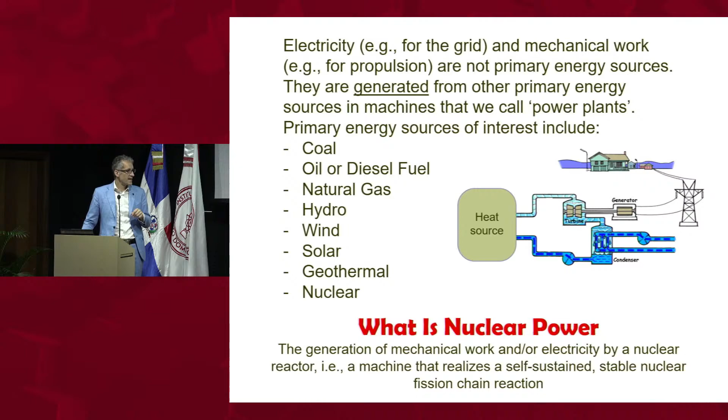Okay, so this goes back to basic physics. Again, very, very elementary. You guys are all scientists and engineers, so you know what the world is made of, atoms and nuclei. Within the atoms, you have a very massive but very small, high-density nucleus. Within the nucleus, you have protons and neutrons. And so the Z number, which is the atomic number, determines basically the element. So Z equal 1 is hydrogen. Z equal 92, for example, is uranium.

Two nuclei with the same Z, with the same number of protons, but a different number of neutrons are called isotopes, all right? And so for uranium, which is a material that we care a great deal about because it's the fuel that we use in nuclear reactors, there are two isotopes of interest, uranium-238 and uranium-235. So keep that in mind, please.

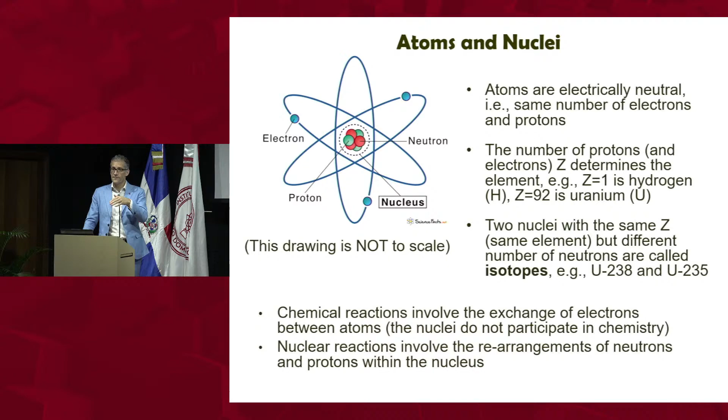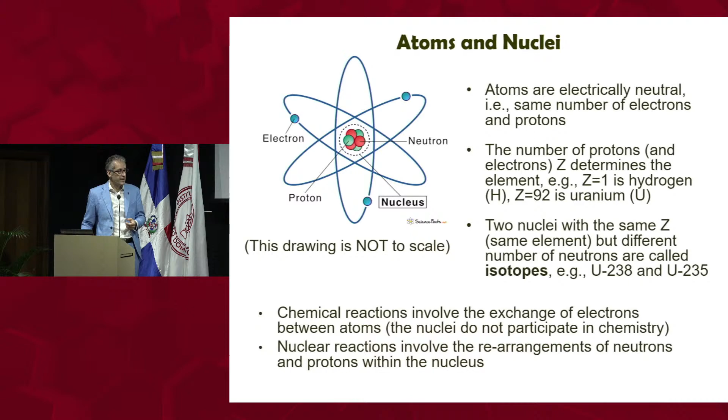Now, the first concept is chemical reactions. When you think about the combustion of something like natural gas or methane, it breaks bonds at the atomic scale. So it involves the exchange of electrons between different atoms. Those are chemical reactions. Nuclear reactions break bonds at the nuclear scale. So it involves the exchange or transformation of neutrons and protons within the atomic nucleus. Okay? And the energy scales for chemical reactions and nuclear reactions are vastly different, millions of times different. This is going to be important, as we'll see, in terms of what a nuclear reactor does and how it works.

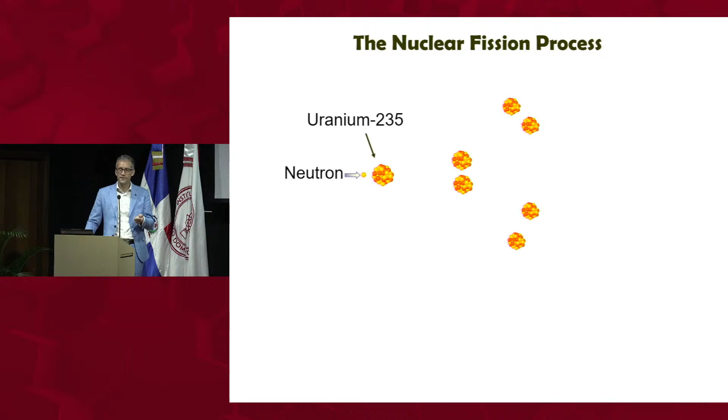Okay, so let's get to fission. So the starting point for the fission reaction is a nucleus of that uranium-235 isotope. If that nucleus absorbs a neutron coming from the outside, then more often than not, it splits into two halves. That's the process that we call fission. So it splits here into two fission fragments. Those are two lighter nuclei that come out of this reaction. Very importantly, this process liberates a lot of energy, which is going to be in the form of kinetic energy of these fission fragments.

And also very importantly, as you see here, this reaction liberates two or more additional neutrons. Why is that important? That's the interactive part, so someone can answer. Why is it important that this reaction also generates additional neutrons?

Because I can then create a chain reaction. If those neutrons find new nuclei of uranium-235, then I can have additional fission, you can see here, and then additional fission, and it goes on and on and on. Now, if I allow this reaction to take place very rapidly and divergingly, I do not have a nuclear reactor. I have an explosion. I have a nuclear weapon.

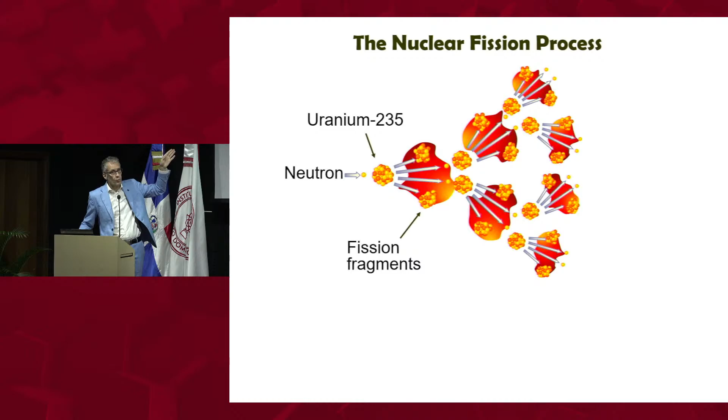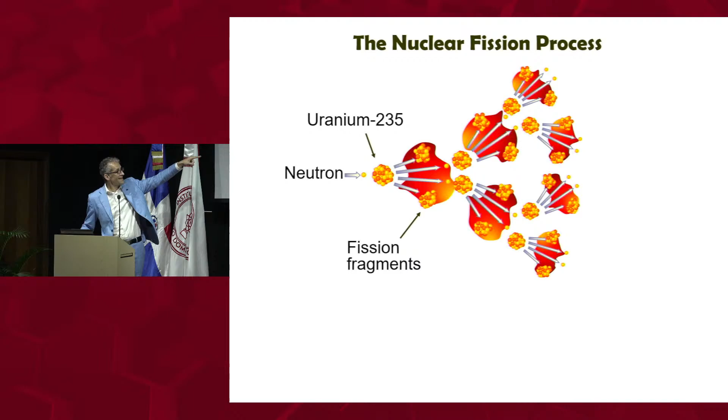But it turns out that it's actually very straightforward to control this reaction, to make it happen such that the rate at which fission takes place is constant. And so then it becomes nice and stable. So then what do I have? I have a constant source of heat, because the kinetic energy of those fission fragments is quickly converted to internal energy, or if you wish, thermal energy of the fuel itself. So fission essentially is a heat source, just like the combustion of coal or natural gas are heat sources. Okay?

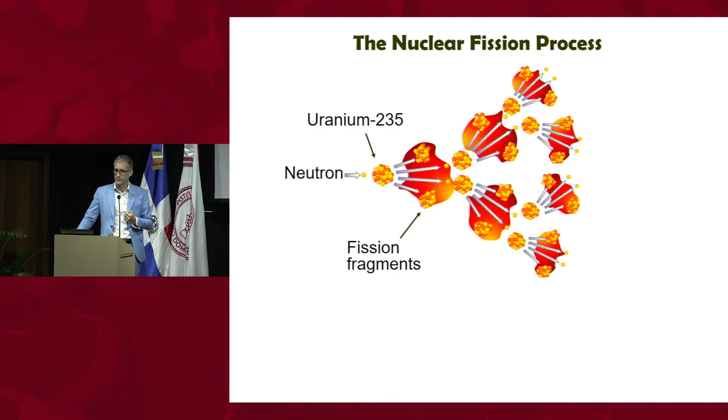Now, that fuel is uranium-235, that isotope. Is it rare? Is it common? Well, unfortunately, it's not very common. Only 0.7% of natural uranium, uranium is a material that we mine from mines, as I'll explain in a few minutes. Only less than 1%, 0.7% is uranium-235. That's the material that we care about. The rest is uranium-238, which is, to a first approximation, fairly useless. Okay, so again, keep that in mind.

I see people are nodding along, so you guys are following. I haven't put you to sleep yet.

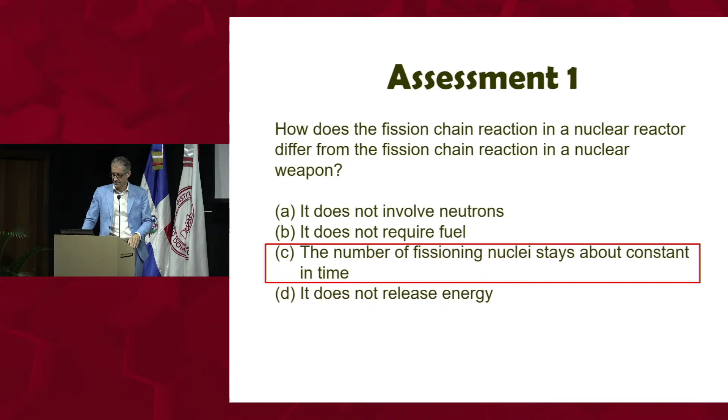Okay, that's great. Okay, so there is a great deal we can learn about nuclear reactors if we compare it to other energy sources. So here, I'm going to compare it to coal and natural gas. All right? So let's start with coal. We go back to basics, chemical reactions. You guys have seen this over and over again in your earlier classes. So when you talk about coal, you're really talking about the combustion of carbon. Coal is carbon. Right? So the reaction shown there is carbon plus oxygen. Where do I get the oxygen? From the air, right? From the air.

I get CO2. That's the unfortunate part. That's why people no longer like coal. We've been using it for 200 years. But now we no longer like it because it generates CO2, which is a greenhouse gas. That's the bad part. And then I get some amount of energy. It's of the order of some electron volts. For those of you who remember, again, these units, okay? That's a tiny amount of energy that comes out of a chemical reaction. Okay? How about natural gas?

What we call natural gas is, by and large, CH4, which is also called methane. CH4, okay? So what does that reaction look like? CH4 plus, again, some oxygen. I get, unfortunately, CO2, bad news. I get a little bit of water. That's no problem. Goes into the atmosphere. There is plenty of water in the atmosphere. And I get 2 units of energy. Okay? So natural gas on a per reaction basis actually gives you a little bit more energy than coal. That's all good. Now let's look at nuclear.

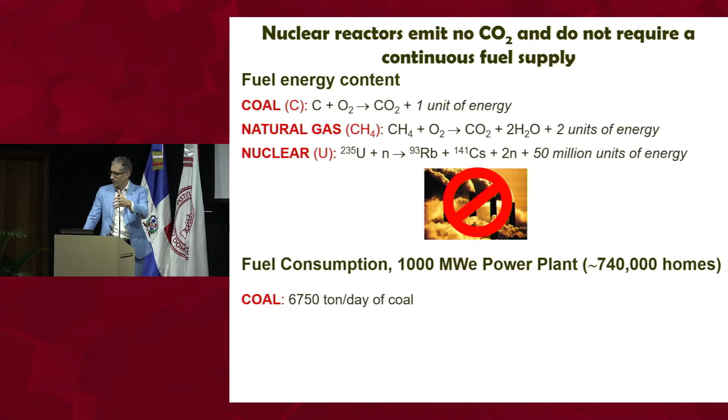Now, you guys have a big coal power plant here, maybe multiples, right? Catalina Point, right? Punta Catalina, or others. What does a coal plant look like? Well, yeah, it's kind of dirty, yes. But there is one feature that everybody notices about a coal plant. Isn't there a mountain of coal sitting outside? There is literally a mountain of coal sitting outside. And then there is usually a railroad. Why is there a railroad? Well, because you got to feed this beast 7,000 tons of coal per day, which means you got trains coming in on a daily basis, bringing coal all the time. No coal, no power. Right?

How about natural gas? Well, it's a gas, so you don't bring it by train. You have a pipeline. This plant would require 64 cubic meters of gas per second. That's, again, an exceptionally large amount of gas. And as soon as that supply of gas is interrupted, you don't get any power. Okay? So the nature of fossil plants is that unless you continuously fuel them, they don't work.

How about nuclear? Well, because the energy content of uranium is so high, that power plant would require 3 kilograms of uranium-235 per day. 3 kilograms, not 7,000 tons, not millions of cubic meters per day, but 3 kilograms. That 3 kilograms is something that I can hold in my hand, okay? So that's how much energy you have in there. The implication is that nuclear reactors don't have to be refueled all the time.

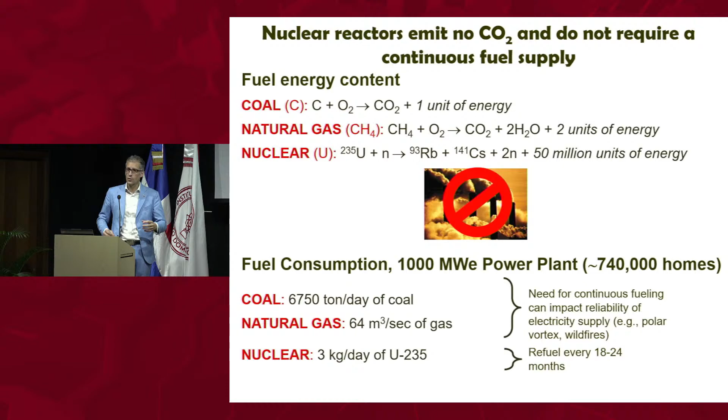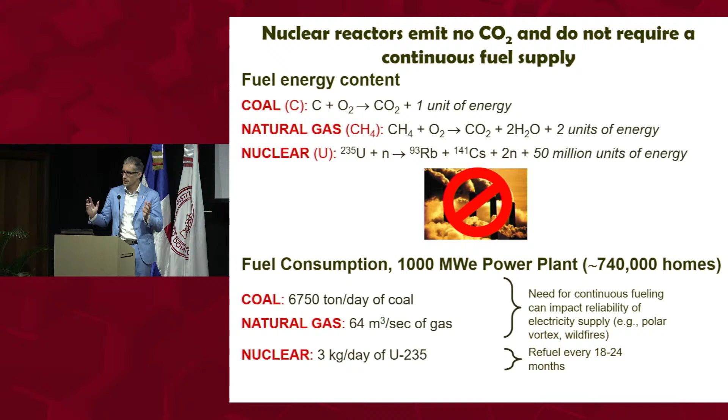Now, the latest design of a nuclear powered submarine in the United States is called the Virginia class. It's an attack submarine. And it's never refueled. In other words, they put the fresh fuel, the uranium, into the core, into the reactor at the beginning. And for 25, 30 years, for the lifetime of the boat, there is no need to refuel that sucker. It's amazing. And that's because the energy content of uranium is so high that you can keep going for ages without having to refuel. Okay, so big difference there between fossil and nuclear.

All right, so where do we get this magical material? It's all about uranium. Uranium is the fuel, okay? So I'm going to talk a little bit about the uranium fuel cycle. Where do we get it? How do we process it? In what form does it go in the reactor, etc.

All right, first thing is, like every other energy source that uses a fuel, you should ask yourself, how much fuel is out there? Right? You might have heard that, for example, in the past, people were concerned about, we're going to run out of oil. We're not going to run out of oil, by the way. There is so much oil out there, it's crazy. Same thing for natural gas. But the question is, are we going to run out of uranium?

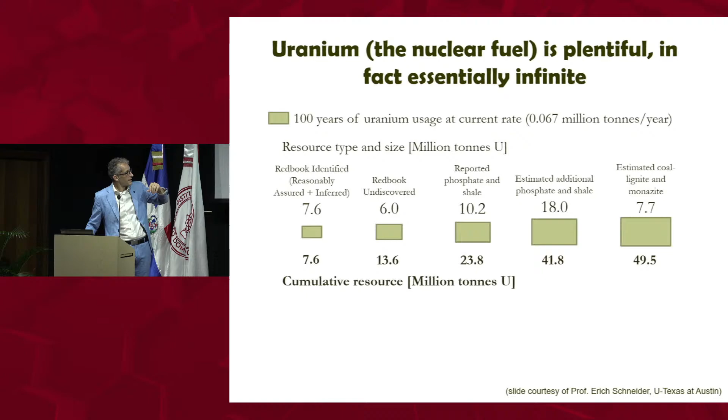So that would be 23.8 versus 7.6. That's about 3 times as much. So that's 300 years. And then if you go to additional estimate, maybe doubles. And then additional estimate, it goes up by another factor of whatever it is, 49.5 divided by 8. So based on these estimates for either what we know is cheap uranium as well as tailings from other minerals that contain uranium, you could probably go on for maybe 600, 700 years, okay? You say, well, is that enough? Okay, I think it's enough.

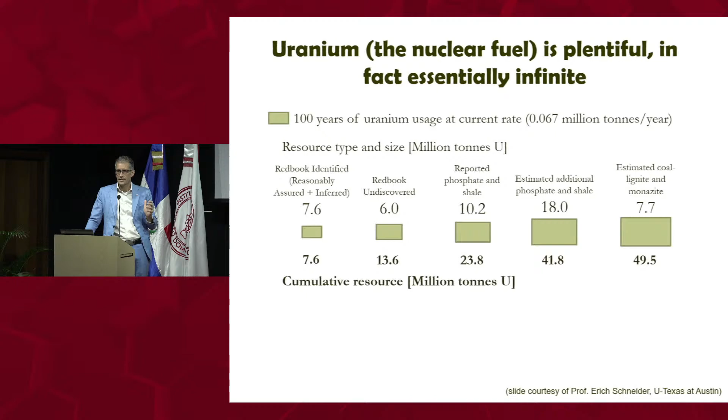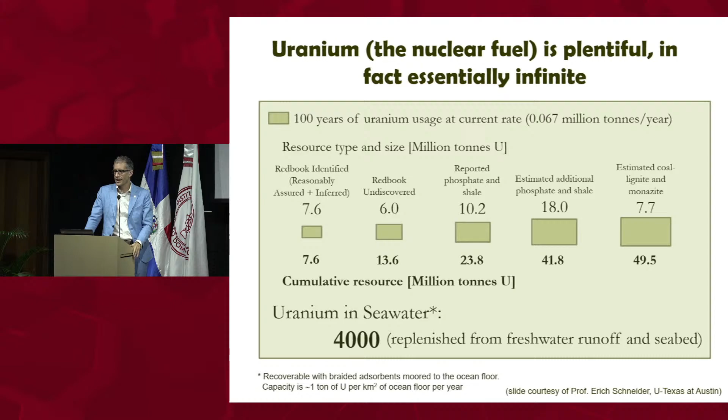But the truth is that there is uranium in seawater, naturally. There is parts per billion of uranium in seawater. Well, there is a lot of seawater, okay? So if you look at the number there, then it becomes practically infinite. So if we're able to extract uranium from seawater, which is actually relatively straightforward, then you're looking at uranium reserves or resources that are out in the tens of thousands of years. So we're not going to run out of uranium. That's good news.

Now remember what I said at the beginning. What we use as fuel is the isotope 235 of uranium. That's less than 1%, okay? So the fuel, to be useful in a reactor, has to be enriched. Enriched means that you have to increase the concentration of uranium-235 from 0.7%, which is natural uranium, up to, say, 5%. Okay, so you have these different categories of enriched uranium. Natural uranium 0.7, then you have low enriched uranium between 3 and 5%. That's what we use in current reactors, so you have to juice it up a little bit.

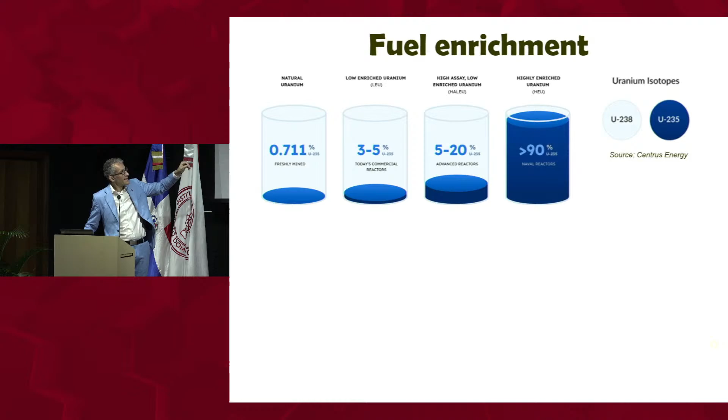There are some advanced reactors which use 5 to 20%, and then if you go all the way up above 90%, that's what the Navy uses. And by the way, that also becomes weapons-grade material. So when you go above 90%, in principle, you could use that also for nuclear weapons. All right? So there are all sorts of, as you can imagine, restrictions on how much you can enrich uranium, because then it becomes more military-based material. But in the commercial world, we stay within 20%, which is considered proliferation resistant.

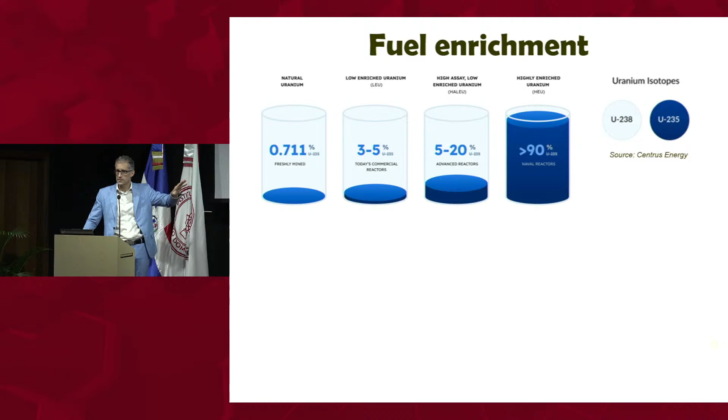Okay. Now, how do you enrich it? This is sort of an interesting process. How do I take uranium, which is natural at only 0.7% U-235, how do I juice it up to say 3 or 5%? Can I do it chemically?

Not really, because uranium is uranium. So whether it's uranium-235 or uranium-238, from a chemical point of view, it's uranium. You can't distinguish between the two isotopes from a chemical point of view. So I gotta do it with physical methods. And the best method that we have now is centrifuges, okay?

So first, you turn uranium, which is naturally a heavy metal, and so it's solid, you have to turn it into a gas. So you see it says there UF6, that's uranium hexafluoride. UF6 is gaseous. Okay, that's a good starting point. And then you inject that gas inside a centrifuge, which is spinning at very, very high speed.

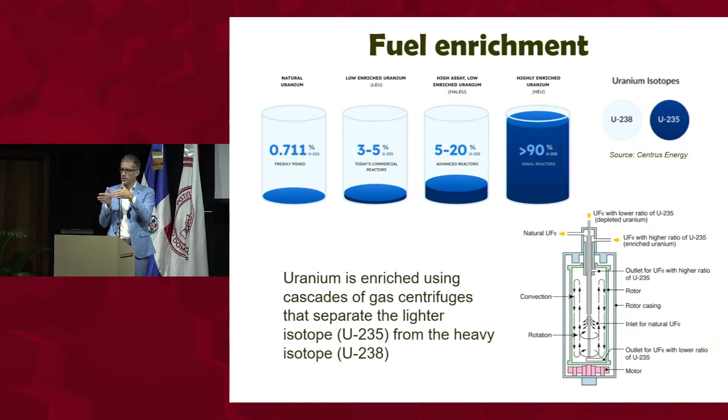Now, why does that separate uranium-235 from uranium-238? Because the mass is different, right? The two isotopes are chemically the same, but their mass is slightly different. So when you're spinning that gas, uranium-238 tends to naturally accumulate on the outside, and uranium-235 tends to stay closer to the center of the centrifuge. Okay? So then you scoop it out, and that's how you get a little bit more enriched uranium in the middle and a little less enriched uranium on the outside.

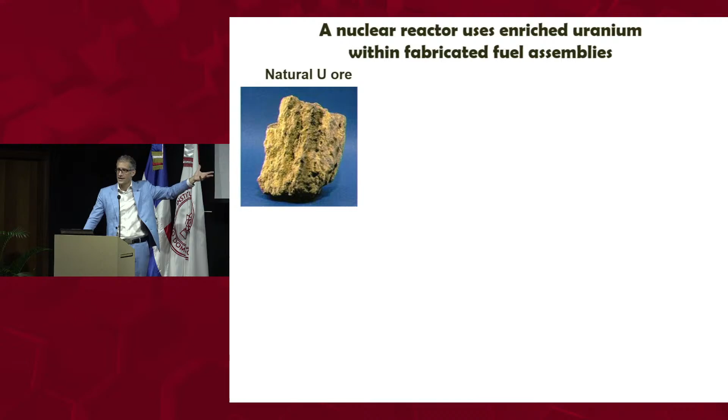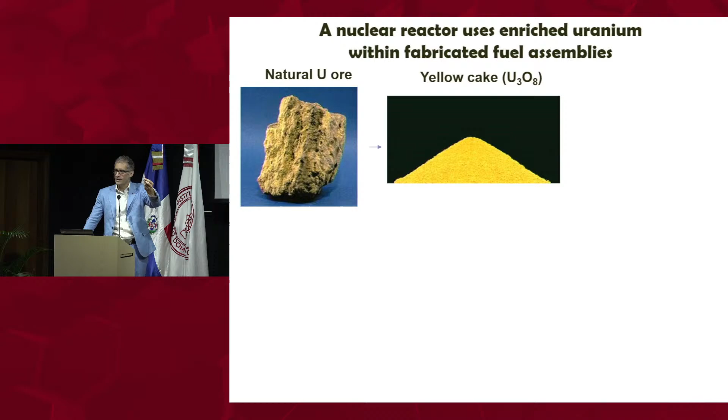Okay, so what does this cycle of uranium look like? This is a mineral that has some natural uranium ore in it. It is traded commercially as what we call yellow cake. This is sort of a funny name for this particular chemical, U3O8. It looks like yellow powdery flour, so it's called yellow cake. All right? Then it's enriched. It's turned to UF6, and it's enriched to whatever level is needed.

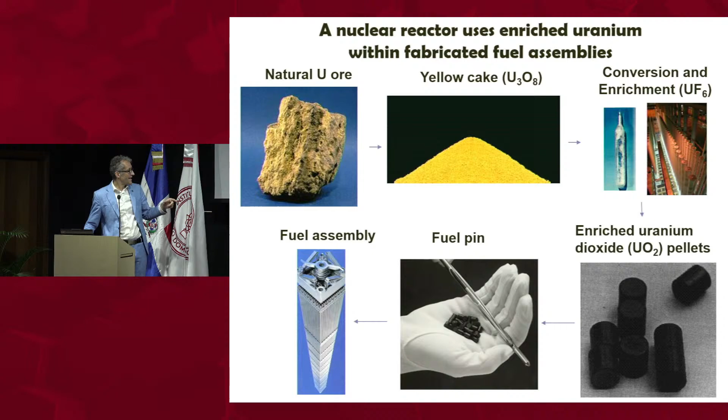It's actually used in the nuclear reactor as uranium dioxide, UO2, little pellets that look black like that. It is slid into these tubes made of a metal called zirconium. This is a fuel pin or fuel rod. So this is the basic element of the reactor. And if you put together many such rods, you get a fuel assembly. This object here is maybe 20 centimeters by 20 centimeters and 4 meters tall. And then it is these fuel assemblies that go in the reactor itself.

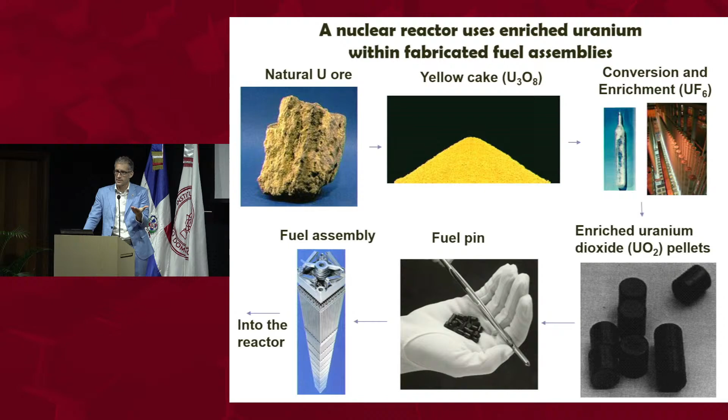Okay, and I'll show you what the reactor core, what the reactor itself looks like in a minute. But this is the fuel assembly or fuel element that goes in. Inside each of those little tubes, you have those pellets of uranium dioxide. That's where the fission reaction takes place. Okay, that's where the magic takes place, so to speak.

Okay, so let's talk about the reactor. What are the basic elements of a nuclear reactor? What do you need? Well, you need the fuel. You need the uranium. No uranium, no party, so to speak. You need a coolant. That's a fluid that picks up all that energy. If you just let that energy linger within the fuel and it keeps accumulating, what's going to happen? It overheats and melts. Okay, you don't want that.

So you need to pick up that energy from the fuel rods and take it elsewhere to do something useful with it. That process is done by a fluid, typically water in our reactors, that basically flows along those fuel rods and picks up the heat, if you will, and takes it elsewhere, okay? So that's coolant. Then we need a so-called moderator.

Moderator is a fancy word for a material that slows down the neutrons. So the neutrons that are born out of fission have a high energy, about 2 mega electron volts. That's high, it means they go around fast. It turns out that the probability for a neutron to cause fission, which is what we want to sustain this chain reaction, is higher if you slow them down. If you reduce their energy from 2 MeV down to a fraction of an electron volt, tiny, tiny. So we need a material that by collision with the neutrons slows them down.

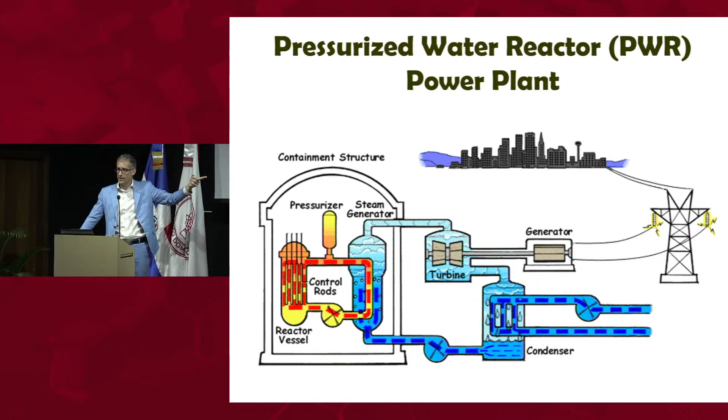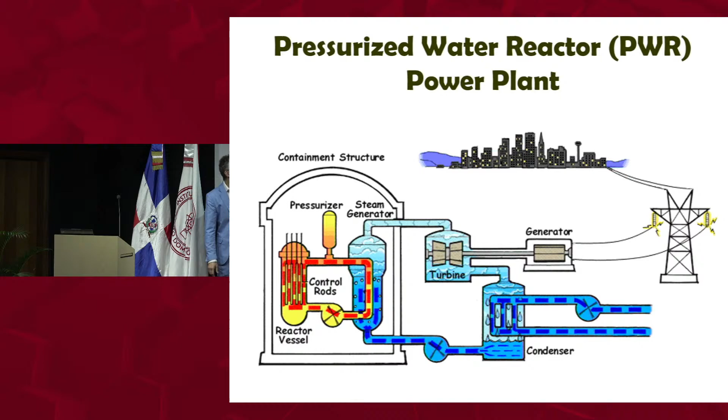So you see the energy goes from here to this blue fluid, which is water at lower pressure. That fluid boils. Now I have steam. With that steam, I drive a turbine, which drives an electrical generator, which gives you the electricity that goes to the grid. And then, as I mentioned at the beginning, I need to condense the steam that comes out here and pump it back to the steam generator. How do I condense steam? I need to cool it.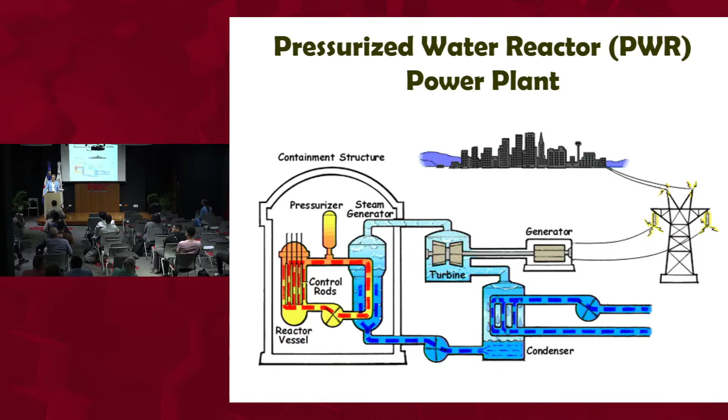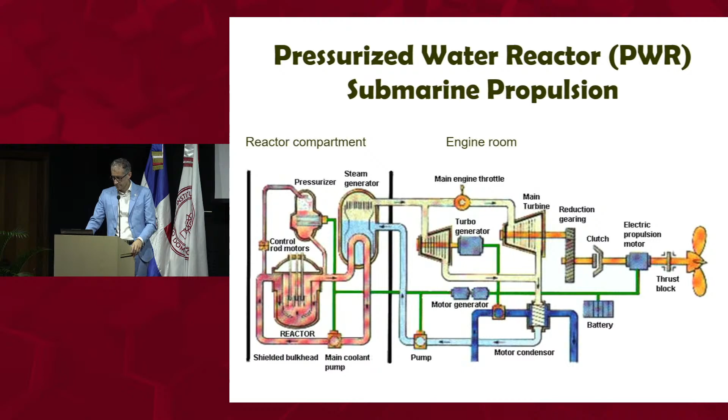What do I use to cool steam? Again, I use water. Water coming in from here, going out there. What water is that? Where is that water coming from? A river, the ocean, a lake. Okay, so that's why these power plants are usually located close to the sea or close to a river, close to a lake, because you basically need to bring in that cooling water to condense the steam. Okay? Submarine, same idea.

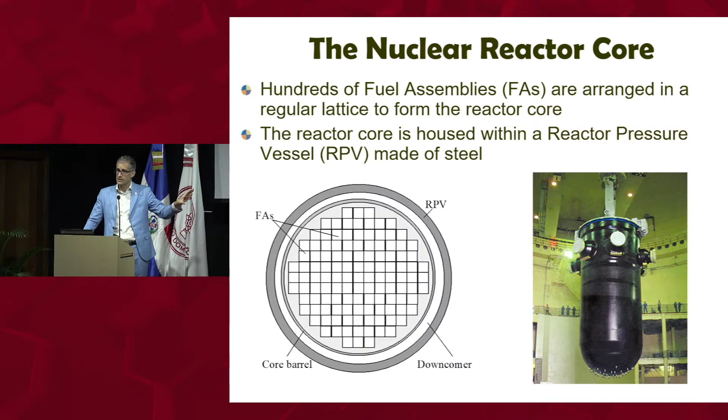You can see there also the size of the vessel. Inside that vessel you have the core itself, the fuel assemblies. All right? I don't know if you can see the scale. You can see a bunch of human beings back there. This is a large reactor. This generates roughly 3,000 megawatts of heat, about 1,000 megawatts of electricity, the power plant. This is the size of the reactor itself. So it's a big, big thing. Okay?

Allow me to skip here, but I'll note this is a more detailed view of what's inside the reactor vessel. You can see there is a lot there. The core is down here. These are your fuel assemblies. There is another feature that I like to point out up here. You see this bunch of rods sticking out of the vessel. Those are the control rods, okay?

So remember, as I said a few minutes ago, I can slide in and out rods of materials that absorb neutrons and control the power level. Those are the rods that I was talking about. And then, of course, you have a bunch of nozzles here to bring in and out the coolant. The water has got to be able to come in, heat up, and go out. Yes?

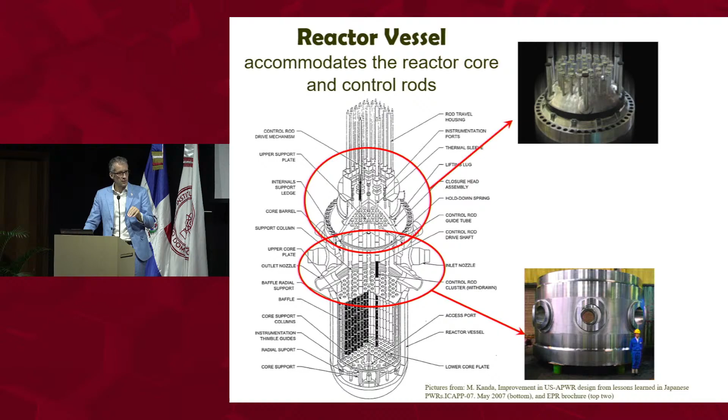I am wondering how the reactor is safe. We'll talk about safety. Hang in there. It is quite safe. It's intrinsically stable. And what I mean by that is if there are any perturbations to the steady operation, the reactor responds to put itself back into the steady conditions. So it's designed to be intrinsically stable. But we'll get to it.

I'm going to skip this. So an important element of the power plant is that turbine, that big spinning turbine attached to the generator, okay? Again, for a large nuclear power plant, 1,000 megawatt of electricity, this is what a turbine would look like. Of course, here it's been maintained, so you actually get to see inside a turbine. A turbine is a shaft with a bunch of blades, okay? It looks like a wheel, doesn't it?

Right? And basically, you blow the steam through these blades and it creates a torque which turns the shaft, all right? And you have multiple stages, as you can see here. So the steam comes in here in the middle, and then it blows outward this way and that way. In this case, you got 8 repeated turbines, both high pressure and low pressure, and down here is the generator.

Now, do you know how fast this spins around? How many rounds per minute? You say, wow, what is he asking me? What kind of crazy question is this, right? Why would I know? 10,000. You want to say 10,000. I want you to be absolutely precise. Because you know this. You have to think about it.

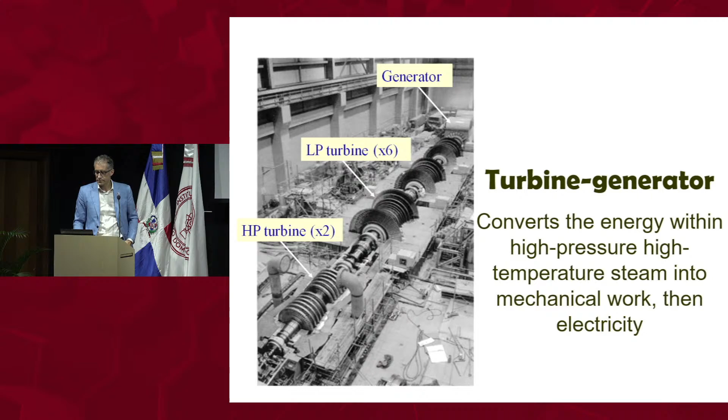All right. Now, let's think about this whole power plant as a big black box. What goes in is heat from fission. What comes out is electricity. That's all good. Wouldn't it be lovely if I was able to turn all the heat that I get from fission into electricity? That'd be great. That would be a 100% efficient power plant.

But guess what? Whether it's a nuclear plant or a coal plant or a wind or solar, the laws of thermodynamics always apply. There is no shortcut. There is no exception ever. So in particular, there is a second law, this pesky second law, which always limits the efficiency of systems. According to the second law of thermodynamics, a power plant that takes in heat either from fission or gas or coal or sunlight or geothermal, whatever, and gives you electricity, also has to discharge some waste heat, cannot convert 100%. There is some heat that has to be discharged to the environment.

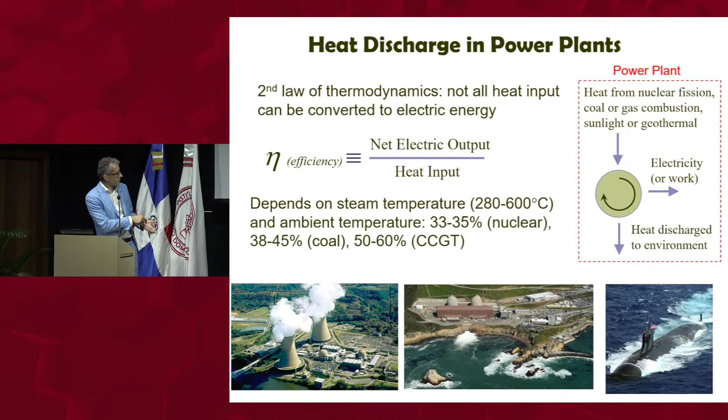Now, the implication of this heat discharge to the environment is, as I said earlier, that all these power plants ought to be located close to what we call a heat sink. It could be water from the ocean. It could be water from a river going into a cooling tower, or if it's a submarine, well, it's again water from the ocean. Okay, but some of that energy's got to be released back into the atmosphere.

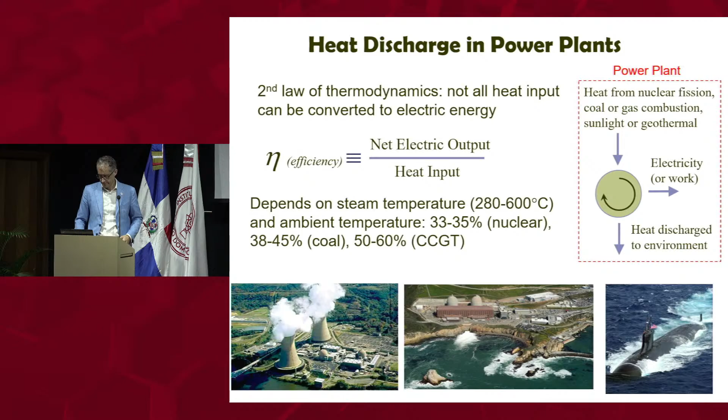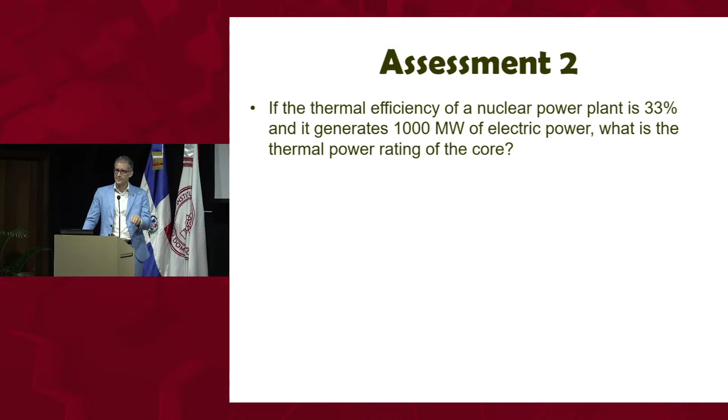All right, so here comes the second little homework, or quiz. If the thermal efficiency of a nuclear power plant is 33%, and that plant generates 1,000 megawatts of electricity, what is the thermal power? What's the heat that comes out of the reactor? I got to get to 1,000. I have an efficiency of 33%. What do I need to start with, fission-wise? 3,000. 3,000, okay? So there you go.

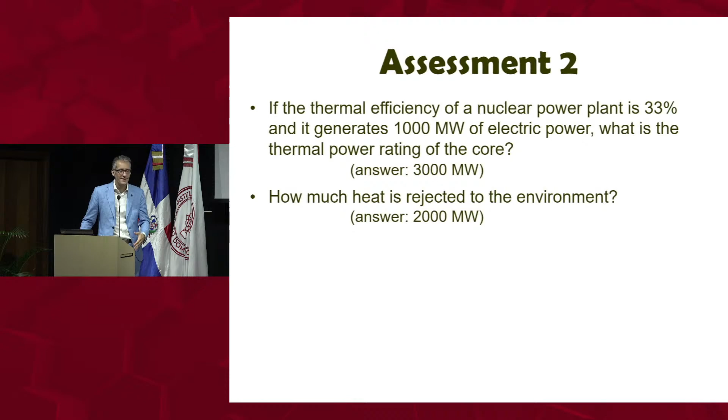How much heat is rejected to the environment in this case? So I start with 3,000 megawatts fission. I give 1,000 of electricity to the grid. I see people are doing it: 2,000 got to go to the ocean or whatever it is, okay? So this efficiency is a big deal, unfortunately. If it was close to 100%, it would be great, but we got to waste all that energy.

Second law of thermodynamics. What are the downsides associated with heat rejection in nuclear power plants, or for what it's worth, in any other power plant? Reduction in electric output for a given thermal power rating of the core? Yes, absolutely, that's the efficiency business. Thermal pollution, I haven't talked about this. Can you just discharge this heat into the ocean? No problem? Why not? You're raising water temperature, fish may not like it, so there are very strict regulations, okay?

You cannot just dump water at 90 degrees C into the ocean because you're gonna boil fish, okay? So you don't want that. So there are strict limits on how hot you can return your water to the ocean or a river or anything like that. Additional costs associated with heat rejection equipment. For example, I need a condenser. Or all of the above. All of the above.

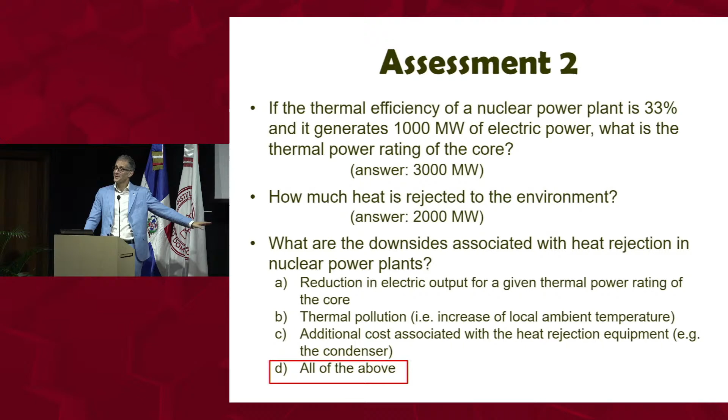Do you like the little quizzes or not? You good? Okay.

So we talked about where do we get uranium, what do we do with it once it's in the reactor. I showed the reactor. Now, what happens at the back end of the fuel cycle? Once I take the spent fuel or exhaust fuel out of the reactor, what happens then? That's what we call the back end of the uranium fuel cycle. Okay. So the first thing I want to impress in your mind is what people call nuclear waste is the fuel, the spent fuel that comes out of reactors.

Unlike a coal plant or a natural gas plant, there is nothing burning here. You don't start with a material and burn it and let it spew into the atmosphere. That's not a nuclear reactor, okay? The fuel, the spent fuel or waste, is still the fuel assembly. Does that look any different than when it went in? Not at all. Still the same thing.

Now, who here likes the Simpsons cartoons? At least you must have seen it. You like it or you've seen it. Okay, so Homer Simpson works at a nuclear power plant, the worst possible example of a nuclear operator. But on occasion in that cartoon, they show you nuclear waste. What does it look like? It looks like green, glowing, fluid ooze coming out of barrels. Okay?

No, it doesn't. This is the nuclear waste. It looks exactly like it went in. What's the difference? The difference is that some of that uranium-235, which was our fuel, has now become those fission fragments, those fission products. Those products are radioactive. So it looks the same, but it's highly radioactive. That's why it's waste and it has to be handled carefully. But it's not green, it doesn't glow, and it's not liquid ooze coming out of a barrel, okay?

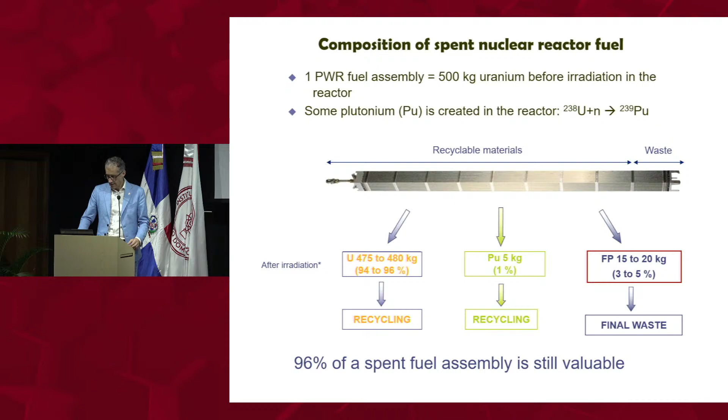That's the point. Well, with that in mind, what does the back end of the fuel cycle look like? We already talked about: I mine it, I need to enrich it, I fabricate the fuel, I put it in a reactor, and then if I do what we do now in the United States, once the fuel comes out of the reactor, it's put in an interim storage. It's just sitting there to cool down, basically. So you naturally let that radioactivity go away.

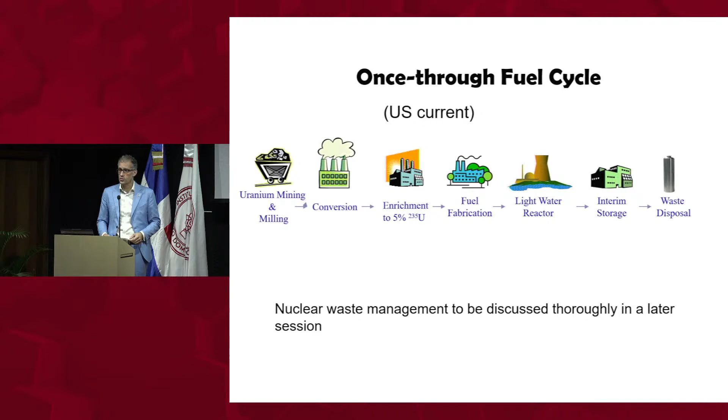And then finally, you do direct disposal. So you put it into a form that is a little bit more stable, and eventually you put it underground. This is called the once-through fuel cycle. So there is no recycling, no reprocessing. It goes through. But it's not the only option. If you understand what I told you 2 minutes ago, there is still a lot of valuable material in that spent fuel that comes out of the reactor.

So other countries, for example, France, Japan, Russia, and even China, reprocess the spent fuel. So the front end is the same. I put it in a reactor. I still put it in interim storage for a while. You want the radioactivity to decay off a little bit, because otherwise it's very difficult to handle. But in France, they actually reprocess the fuel.

What it means is that they separate the garbage, the fission products, that's the waste, from what is valuable, plutonium and uranium, and it's put back into fuel fabrication, and then it goes back into the reactor. And you can do that cycle a couple of times before the uranium becomes basically no longer useful, and then you got to trash it. But you get a little bit more energy, a little bit more value out of your overall chain if you do that reprocessing.

What's the downside of this? Why aren't we doing it in the US? It's not that we're smarter. The French love this. They do it. But if you were to see pros and cons of this, what would you say?

It's more costly and complex. Here on a slide, everything looks simple. It's not simple. These plants are very, very big, costly plants, okay? Billions of dollars to build, and they add cost and complexity.

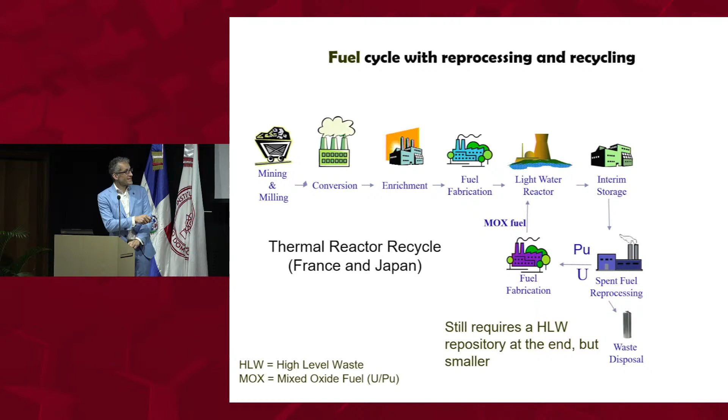There is another pesky little issue with this approach. I separate plutonium, okay? Plutonium is great fuel for reactors, but unfortunately it is also great fuel for nuclear weapons, okay? So when you do this little recycling, you introduce, theoretically, the possibility of separating plutonium and then using it for weapons, okay?

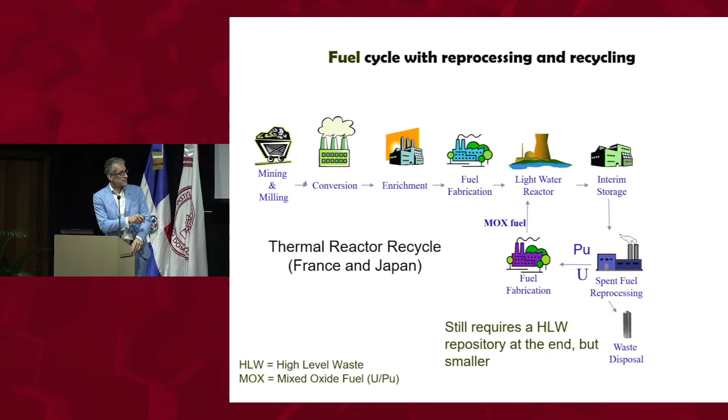So if you decide to go this way, the International Atomic Energy Agency, the United Nations essentially, will make sure that these facilities, these two plants, the spent fuel reprocessing and fuel fabrication, are continuously monitored so that that plutonium is not diverted to weapons use, that it is used just for civilian purposes. Right? So lots of complexity.

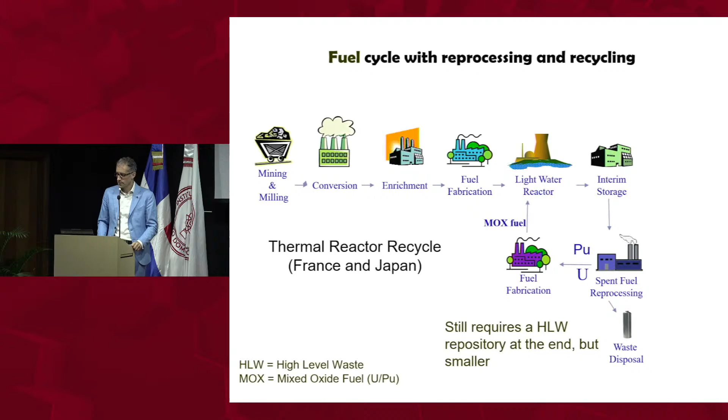Okay, so what are the takeaway messages? What did we learn? First, I hope I impressed in your mind that nuclear energy is a very high energy density source. There is nothing close to that in the universe. You can't beat nuclear, okay? It's just so intense. It's also emission-free, which is why it's now back into the debate in a big way. It doesn't have any CO2 going into the atmosphere.

Let me stop here. Let's take a few questions. And then if you are interested, I can spend maybe 10 minutes or so telling you what's going on now in nuclear technologies, advanced reactors. Could this technology make sense for the DR or not? Okay, but let's see if you have any questions or comments on what we've just presented here. Don't be shy. Yes, sir.

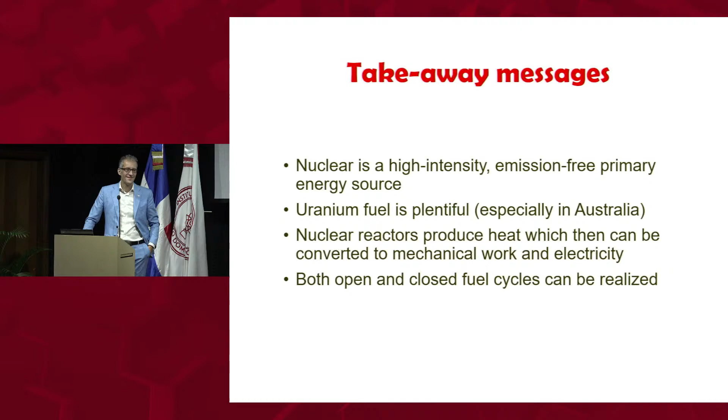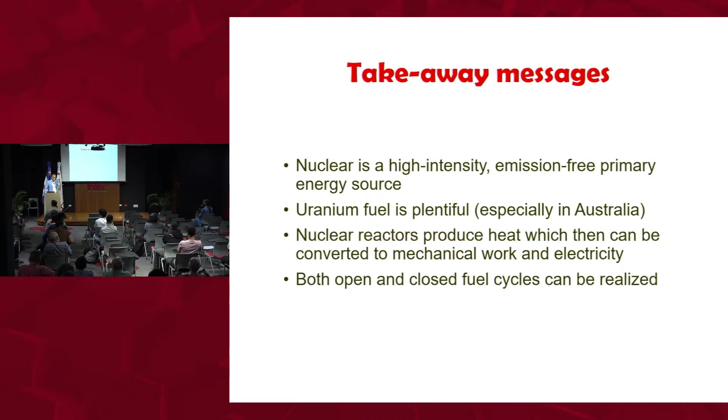Okay, so my name is Raquel Matos. I am doing my bachelor degree in chemical and paper engineering in Michigan, and I am considering doing my PhD in nuclear energy science. So I would like you to give me any advice in that journey, because my family thinks it's dangerous. So I'm just curious.

It's a great discipline. If what I presented here intrigues you, then go for it. University of Michigan has a great nuclear engineering program. Of course, the one at MIT is much better. So you should apply to MIT. You are applying to MIT?

Yeah. Okay. I'm going to talk a little bit more about safety if we go into that second part of the presentation. But the safety record of the industry is actually very, very strong. Now, you're familiar with the accidents. Everybody knows about Chernobyl, Fukushima. But in a way, it's ancient history. The technology evolves. It's a little bit like saying, I don't want to fly because a plane crashed 30 or 40 years ago. So every accident has resulted in improvements in the technology, retrofitting of the existing nuclear plants, et cetera, so that class of accidents could be greatly minimized or eliminated altogether.

So if the Dominican Republic were to go into nuclear energy now, you would build newer plants that are safer than what was in the past. That's always been the evolution. But honestly, the existing set or park of reactors out there is already exceptionally safe.

All that is positive. The energy picture is pretty ugly, okay? It's ugly. You don't have domestic energy resources, so at the moment you import 90% of your energy from outside in the form of gas, coal, oil, and so on. This is energy, okay? So it's everything, not just the electric power sector. It's transportation, factories, industry, everything together.

Now, if you go into the electric power system, at the moment, 85% of your electricity comes from fossil fuels. I'm sure you've heard a lot about, hey, we're building solar plants, we're building wind. They're doing that, but it's still a tiny, tiny little fraction, okay? And when you look at actual electricity generated, by and large, it still comes, I think, in this country from coal, natural gas in particular. This makes your electric grid very carbon intensive, all right?

So what do I mean by carbon intensive? Well, a way to measure how much emissions you produce in your electric power sector is to look at the grams of CO2, mass of CO2 emitted per kilowatt hour of electricity. A kilowatt hour is a unit of electric energy. So at the moment, the DR power sector emits 630 grams of CO2 per kilowatt hour. Is that high? Is that low?

World average is 500. So it's a little bit higher than world average, but it's monstrously higher than other countries that have managed to decarbonize their electric power sector quite a bit. So for example, France, which by the way uses mostly nuclear power, is down to 70 grams of CO2 per kilowatt hour. Norway, which uses no nuclear power but uses all hydro, also low carbon, is even lower than that. It's, I think, 40 or 50 grams of CO2 per kilowatt hour.

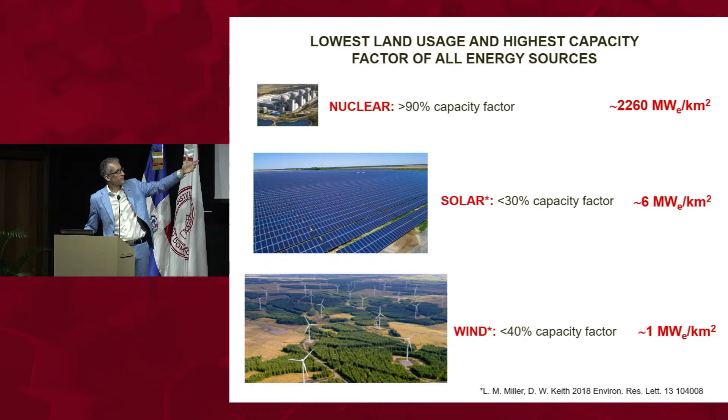And as you said, they take up a lot of land. So what is that figure of merit for those two? 6 megawatt per square kilometer, 1 megawatt per square kilometer, respectively. Okay, so there is a factor of 1,000 to several hundreds difference in the compactness or land usage of nuclear versus renewables, right? So that's something to keep in mind, I think, particularly for a country like the DR, which is not enormous. You can't carpet cover the whole country with solar panels. Now, again, this is not an either or. You probably want both, but the point is a big difference there.

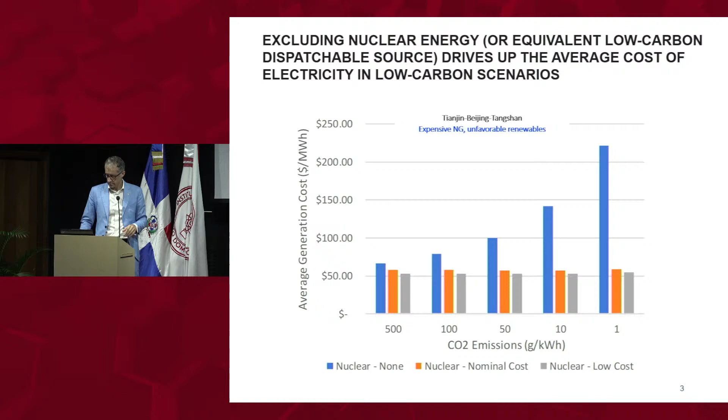Let me skip this one. All right, so now we get to talk about what technologies, what reactor designs are being developed now, what's available. So there are essentially 3 classes of reactors. The first is large reactors. We call them large light water reactors because the coolant is water.

By the way, you might ask, why do I say light water? That's H2O, because there is another reactor type, which I'm not going to mention other than now, that uses heavy water. What is heavy water? It's still H2O, but the H is not H1, it's H2, deuterium. Okay, so anyway, in Canada, they like that better as a coolant than light water.

But this first class is sort of traditional, gigawatt, 1,000 megawatt and plus. There are some designs, 1,600 megawatt of electricity, really, really big. How much do they cost? Well, it really depends on who builds them. The Chinese, the Koreans, even the Russians are very good at building nuclear plants. They've been doing it continuously over decades and decades, so they've gotten pretty good. So you might be close to $2 or $3 billion for a gigawatt. That's actually pretty cheap. I know $1 billion sounds like a lot of money, but it's also a lot of electricity that you get.

In Europe and in the United States, where for many years we did not build new plants, these large plants are now coming in at $10 billion. Now that's expensive. Right? How long does it take? Well, again, companies that are really good at building them build these large plants in, say, 5 years. Companies that are not as good may take twice as much. Right? So that's the first category.

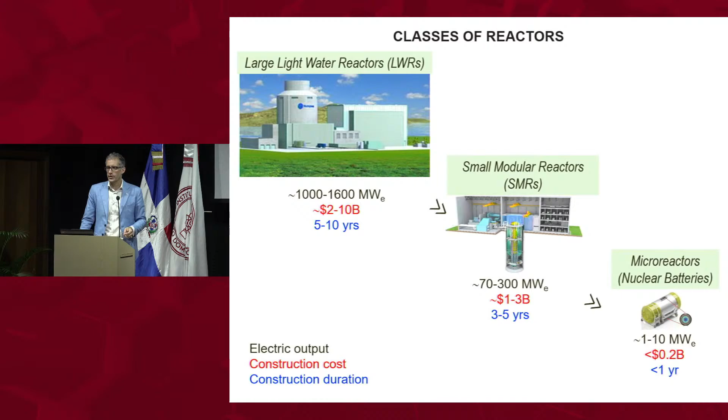And then finally, there are what we call micro reactors. I also call them nuclear batteries. Now, those are really tiny. Now you're down to a few megawatts or 10 megawatts, okay? And the idea here is that they would be built in factories, not a big sprawling construction site, but factories, a little bit like trucks, not like iPhones because the size is still bigger, but truck-size systems, okay? So more efficiently.

Now, if you think about the Dominican Republic, where would it make sense? Yeah, either small modular reactors or micro reactors. Why not large? Because your grid is not that big. What is the total capacity, Manuel? You told me yesterday or someone said? The peak is 7 or something, I thought, the peak? 3,600. Okay, so imagine, your peak demand at the moment is 3.6 gigawatts.

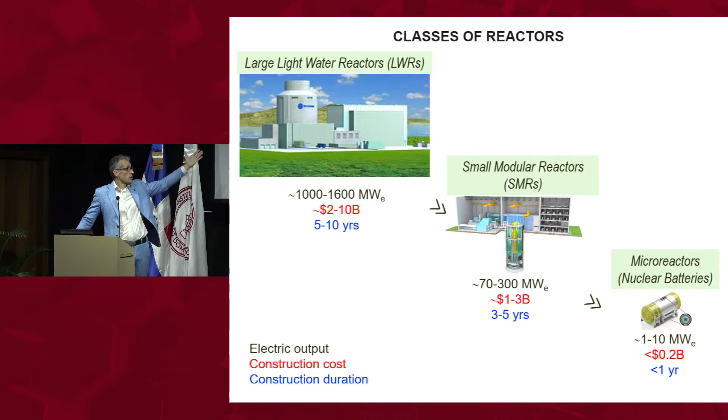Here, we're talking about a single plant taking half of the peak, too much, okay? Because for whatever reason, that plant is down because it's being maintained, refueled, then half of your grid is out, okay? So it doesn't make sense. But 100 megawatts, 200 megawatts, and maybe multiple of those, that would make sense. And then, of course, down to microreactors.

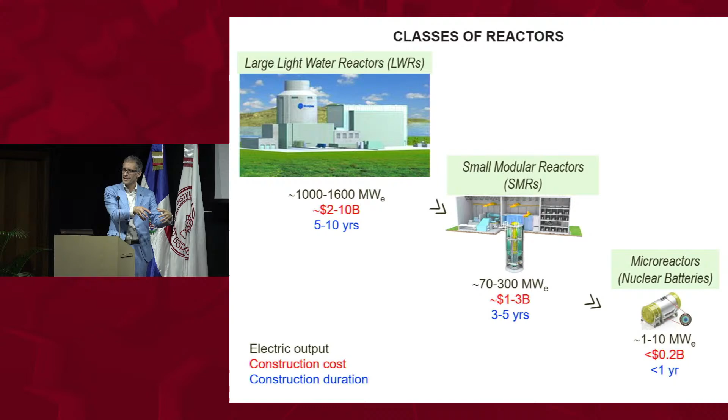Microreactors are interesting because you wouldn't necessarily connect them to the national grid. You could serve local loads. It would be more like microgrids, if you guys know what that means, right? So instead of being connected with big transmission lines, you would generate the electricity and then use it right there where it's generated. Okay, I'm going to skip all of this. I'm definitely going to skip this.

Let's talk a little bit about safety. Okay, so whether it's a gigawatt or a small modular or a micro, all these new technologies now adopt this passive safety concept that I mentioned a minute ago. That's a combination of design features. For example, they could use a different coolant. Some of these don't use water as a coolant. They use helium, or they use molten salt or liquid sodium. These are coolants that don't boil off. So even if there is a leak or something, you're not losing your coolant. You are able to maintain heat removal from the reactor core.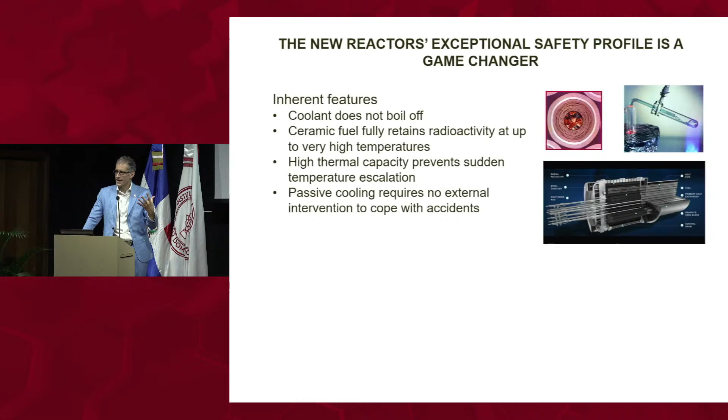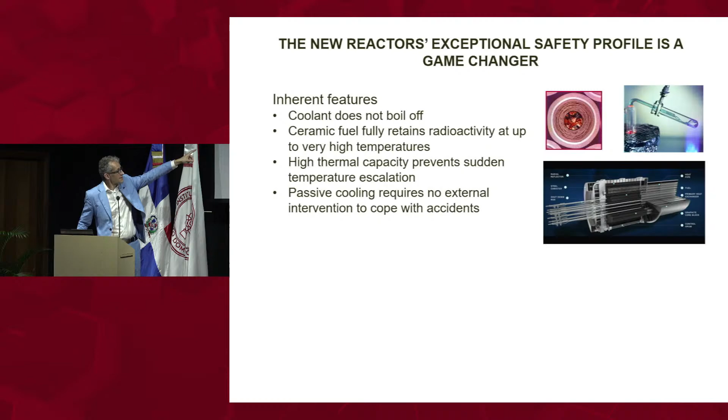They might also have fuel forms that are no longer the uranium dioxide pellets that I showed you at the beginning, but there might be particles with multiple layers that are very robust. What that means is that even if the temperature inside these reactors rises to a very, very high level, the fission products, which are the radioactivity, do not diffuse out. So that's all good news. And then, as I mentioned, safety systems that do not require external intervention. They do not rely on pumps or diesel generators to function.

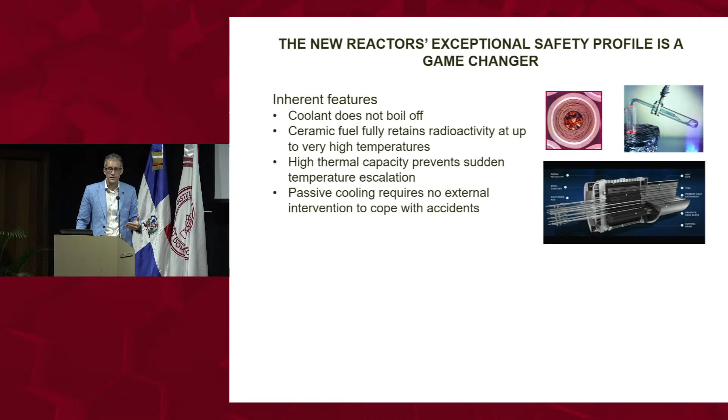So what's the implication of this approach? It's that accidents like Three Mile Island, Chernobyl, and Fukushima are truly eliminated by design, okay? So that class or that type of accident physically cannot happen. Does that mean no accidents can happen? Obviously not. Anything that is engineered can fail, so you can still have failures, malfunctions, whatever you want. But the consequences of these failures, malfunctions, and accidents would be a lot more benign. That's the point, okay? They would be a lot less severe.

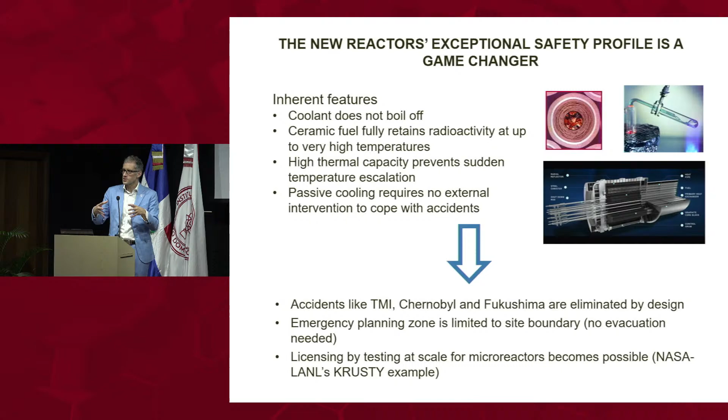In fact, in the United States now, the Nuclear Regulatory Commission, which is the government agency that regulates the nuclear industry, has allowed these new reactors to shrink what we call the emergency planning zone, the area surrounding the plant, down to site boundary, like 100 meters or even less from the reactor itself. What that means is that anybody living outside this emergency planning zone does not have to evacuate if there is an accident, does not have to take iodine pills and things of that type. So this reduces anxiety, it reduces cost, honestly, and makes the whole thing a lot easier to approve.

Getting to the end here. What are you going to use nuclear energy for? Well, the first and most obvious is the grid, the power grid, okay? They could replace coal plants, they could replace natural gas plants. Actually, this is fairly straightforward.

For coal plants, coal plants operate base load, which means they operate 24/7. You don't like coal because it has the emissions, replace it with a nuclear plant, roughly same size, same idea, 24/7. Natural gas plants virtually everywhere in the world don't tend to operate base load, always 24/7. They are so-called spinning capacity, sometimes in reserve, so that if, for example, there is a need for a rapid increase in power, a natural gas plant can respond very quickly and give you that increase in power.

So how do you replace a natural gas plant with a nuclear reactor? Nuclear reactors are not happy when they go up and down in power very rapidly. So one approach that is now being tested in the United States by TerraPower, that's Bill Gates' nuclear company, is to run the reactor at 100% output, store the heat at the site in liquid salt tanks, and then use that heat to generate electricity in a variable manner.

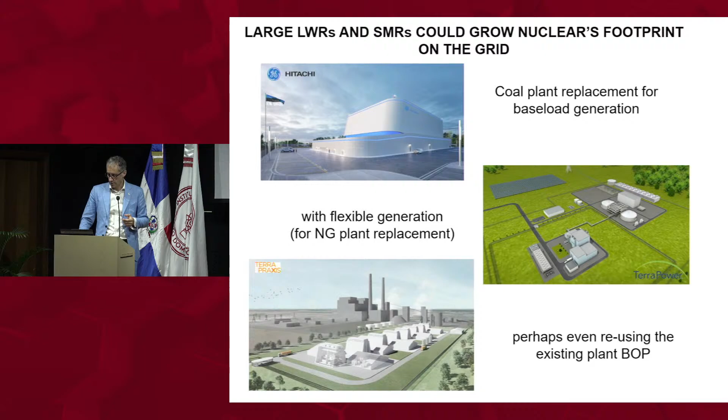But there is much more than the grid. Do you know what fraction of CO2 emissions is associated with power production on the grid? How much CO2 comes from electricity production on the grid? What do you think? 10%, 50%, 100%? About a quarter. About a quarter, 25% of all CO2 comes from electricity production. What about the other 75%?

Cars, trucks, factories, buildings. Where I live, in the winter it gets cold, so we turn on our heating. Now here, you're lucky, it's always warm, so instead of the heating problem, you've got the air conditioning, so you're back to electricity. The point is, other sectors of the economy emit a lot of CO2. So how do we decarbonize other sectors of the economy? For example, how do you decarbonize transportation? Because at the moment, we just use gasoline or diesel. That's fossil fuels.

Yes, that's absolutely a good answer. I'm a big public transportation fan. I take the subway every day. Sure, if instead of driving the stupid cars every day we took public transportation, emissions would come down. But eventually, even if we took public transportation, that public transportation has got to be low carbon. Otherwise, you still have emissions. So how do we decarbonize? Any other ideas?

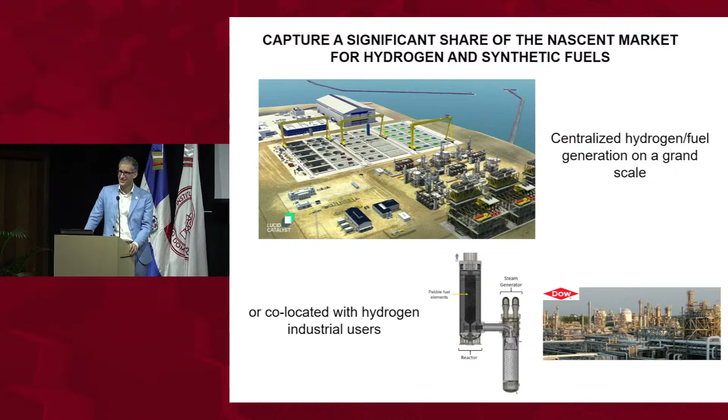Say it again. So electric vehicles require electricity to charge the batteries. That electricity could come from nuclear reactors. Yeah, so that's one approach. Back there, hydrogen enthusiasts? Maybe hydrogen for fuel cells or combustion? Or sustainable fuels that are chemically identical to fossil fuels, but they come from a different source.

Yeah. So look, what I'm fishing for here is, you might have heard about hydrogen, okay? So hydrogen is not a primary energy source. You're not mining it. It's not like oil. You're not drilling and finding hydrogen. It doesn't work that way. You've got to make it. How do you make it? The best way to make it is to split H2O, water, right? We've got water all over the place.

That's called electrolysis. Electrolysis, right? You guys have done the experiment in chemistry. You stick two electrodes in a bucket of water, and you get oxygen at one end, and at the other you get hydrogen. You've done that, right? So you can get your hydrogen, which then is used for fuel cells in cars or trucks, but it requires electricity in, okay?

And if you actually heat up the water to begin with, that process becomes even more efficient. So all this lengthy introduction, just to say that you could use nuclear reactors to make hydrogen. And you can do that on a grand scale, like shown up there, where you have your reactors right next to a chemical plant, an electrolysis plant that splits water.

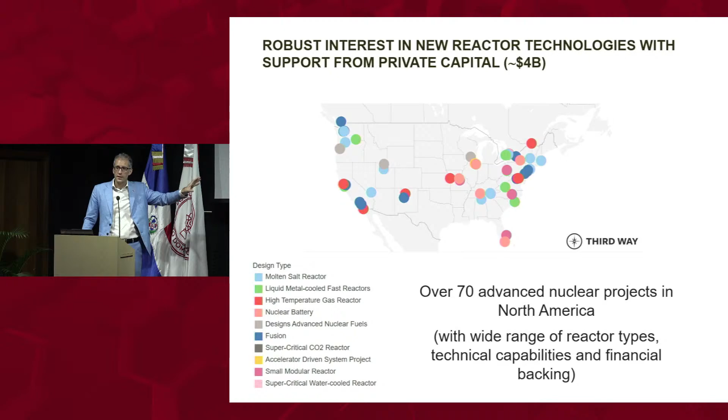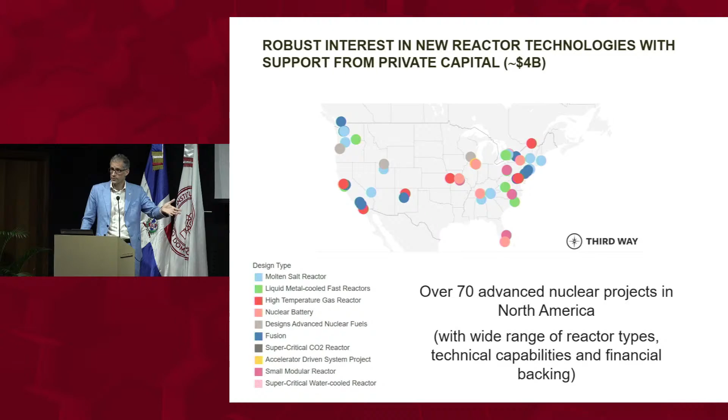So if even a quarter of a dozen, say 3 or 4 of these projects, are actually successful, then that's going to be new because they're not government-driven. They are private industry-driven. So that's all good. So what are some of these projects, the more credible ones? Well, there is one in Darlington on Lake Ontario. This is in Canada, actually. They're building one of those SMRs, small modular reactors, 300 megawatts. And that should come online in 2029.

We'll see. I already mentioned TerraPower, that's Bill Gates' company, in Wyoming, 2030. That's actually replacing a coal plant. So that's beautiful, right? So coal out, nuclear in, you take out the emissions. X Energy, four 100-megawatt reactors at the Dow Chemical site.

So a nuclear reactor is a heat source, right? You guys got that from the previous description. Fission gives you heat. So if you're interested in electricity, you've got to go through that power cycle that we discussed. But if you're interested in heat, you can sell heat directly from the reactor to a customer. Dow Chemical, a big chemical plant in Texas, mostly requires heat. And so the point of this project is to basically sell heat to that plant and decarbonize the production of chemicals. It's pretty exciting.

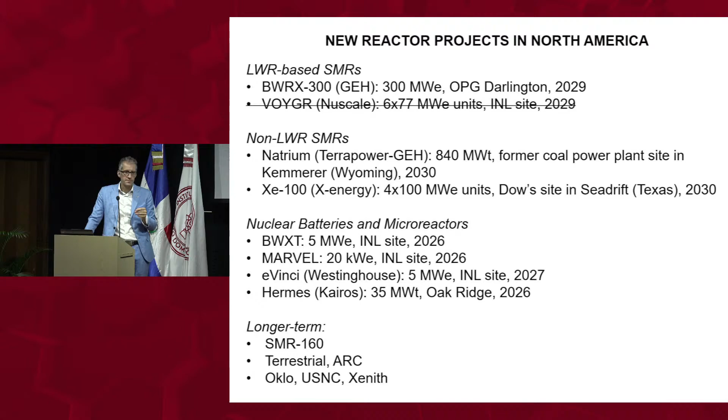And then finally, you see these microreactors. Those are actually on a shorter schedule because it's so much easier to make them and test them. And it doesn't entail multi-billion-dollar investments and things like that. So you see here 2026, 2027, et cetera. And this is the last slide, I promise.

So a lot has happened in the past 4 years. If I had given this presentation 10 years ago, the tone would not be so upbeat. But so much has happened in the past few years, all of which has been, at least for nuclear, positive. Now, obviously, the invasion of Ukraine is not positive. But what has happened with the invasion of Ukraine is that a lot of countries have realized how important it is to be energy independent, to the extent possible.

It's impossible to be 100% independent, but try to reduce the amount of imports. And nuclear can do that because once you've bought the fuel, if you understand the basics, you have basically power for many years, okay? So it doesn't keep you on that umbilical cord or supply chain that is required elsewhere. How about climate?

Well, climate has been the big game changer for nuclear, big time. Okay, now all of a sudden we want energy that is low carbon, doesn't emit CO2. Well, you know what the COP is? COP, like Conference of the Parties. These are these big gatherings of government, industry, NGOs, academia. They meet every year, usually in locations that are very pleasant.

Maybe they should come to Santo Domingo.

But COP28 was in Dubai, for example, okay? Now the 29th is coming up. For the longest time, nuclear was completely ignored in these meetings, like an outcast. Well, the past 3 editions, nuclear was front and center.

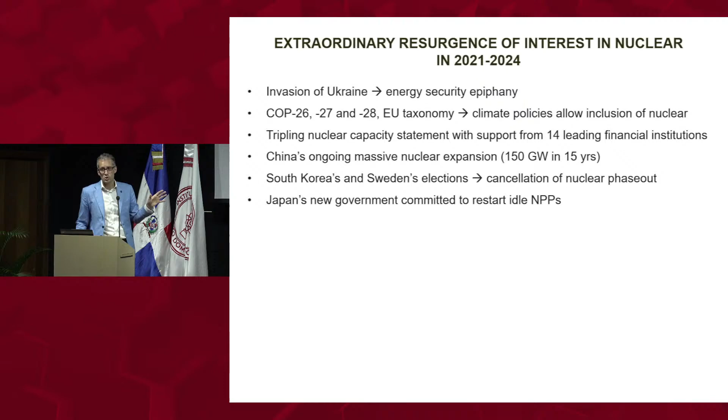Even Japan, in spite of the accident, they want to restart the nuclear power plants that have been idle for a while and potentially build more. But in Japan, it's a really, really tough environment for nuclear.

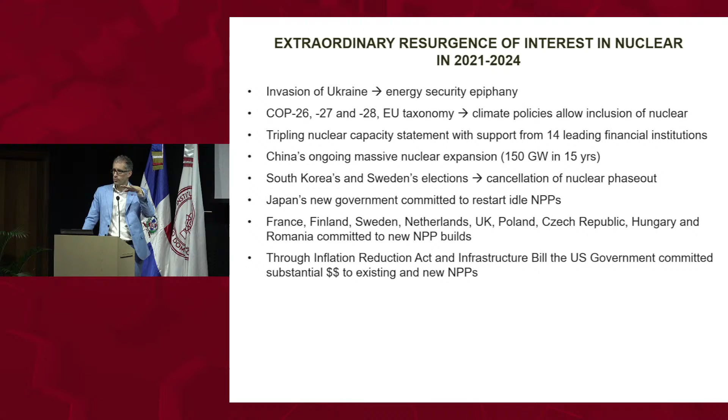Inflation Reduction Act, that's a piece of legislation that the Biden administration passed a couple of years ago, which had hundreds of billions of dollars of subsidies for clean energy technologies, and nuclear, wind, and solar were all put on the same level. So that's good news. That means the government recognizing the value of nuclear. We already mentioned a few nuclear build projects launched in the US and Canada. I mentioned the Dow Chemical, and so on.

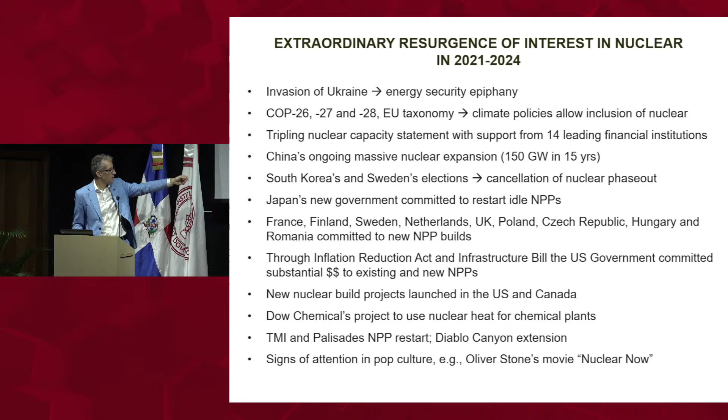So the question I have for you, and this is a presentation I gave yesterday at a big electric reform forum, is will the Dominican Republic join in, or at least consider? I think the time is now to at least start the conversation. And I know that some people here in the room are actively working towards that. So with that, I stop, and let's see if there are any last questions here.

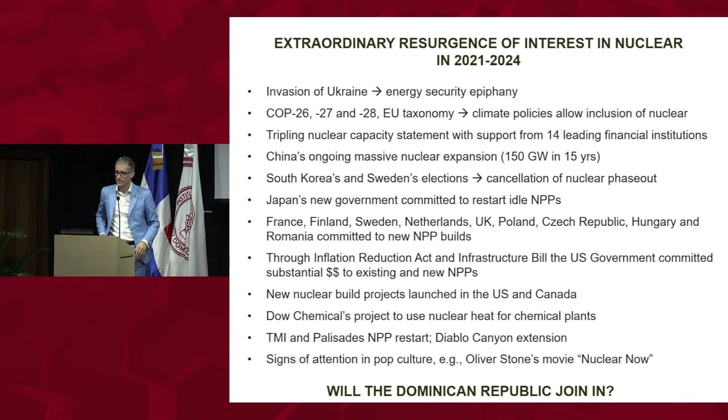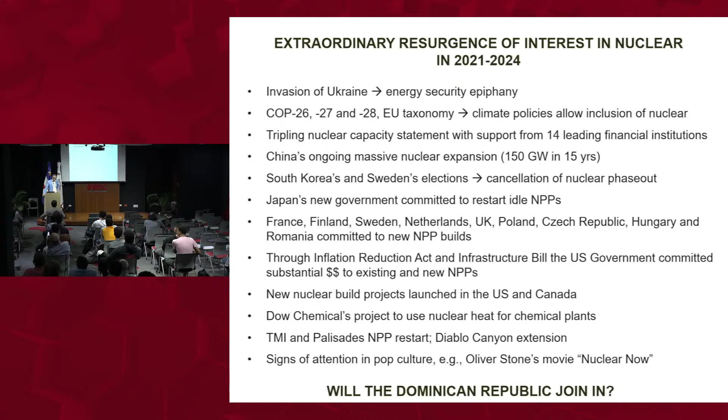Yes? If we go through it, let's say we have a small generator. Yesterday when you gave us this presentation, some guys, we were talking about having this here, and it's like, it's dangerous, we are not still prepared for it. This needs a lot of engineering and safety discipline. So if we go through it, what would be the 3 or 4 key elements for safety that we should care of? Yeah, that's a good question.

So it's not like you snap your fingers and tomorrow you're going to have a nuclear power plant, okay? So it's a journey. The International Atomic Energy Agency, IAEA, a United Nations agency, has a template for countries that want basically a nuclear energy program. And the template has multiple steps. And depending on your initial condition, to use a mathematical term, it can take between 10 and 15 years from the time that the decision is made to launch a nuclear energy program to the time you have your first production of nuclear electricity.

Okay? There are examples 10 years, other examples 15 years, but that's the typical time. So now, getting to your question. Safety-wise, there are a couple of things that the IAEA will demand you do. First, you have to set up an independent nuclear regulatory agency. So this is a government agency that is separate from the nuclear industry that will regulate the nuclear industry in